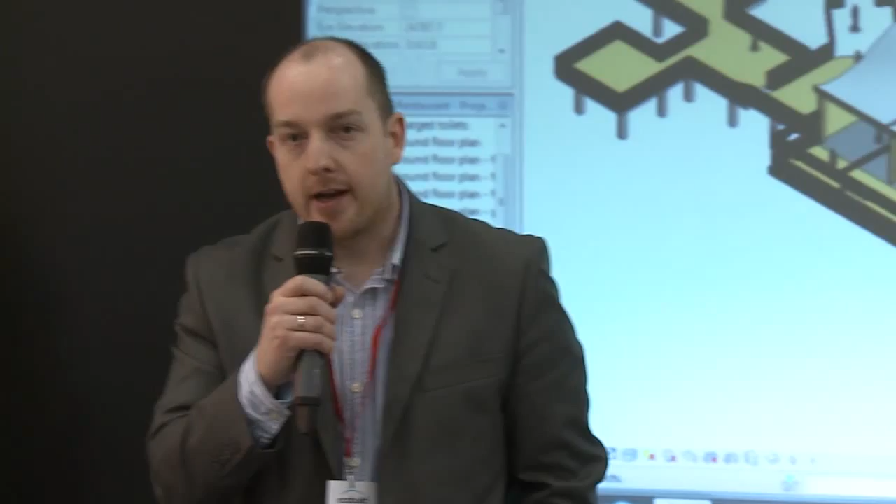Thank you, Paul. Hi, my name is Stephen Hamil, and I'm Director of Design and Innovation at NBS. For the next 15 minutes I'm going to talk about the National BIM Library, an initiative we launched at EcoBuild last year, about producing standardized BIM objects that are free for the construction industry in the UK.

We've got about 600 objects live now. 400 are generic, meaning no manufacturer is mentioned, but they've got standardized property sets behind the scenes. And then we've got about 200 now that are proprietary, so manufacturer objects representing the actual manufacturer performance properties and operation properties.

What I'm going to do today is not open up PowerPoint, but I'd like to just play around with some of the software and see where that takes us. So what we're looking at on the screen at the moment is a package called Autodesk Revit, but the objects also come for Bentley, AutoCAD, and Vectorworks.

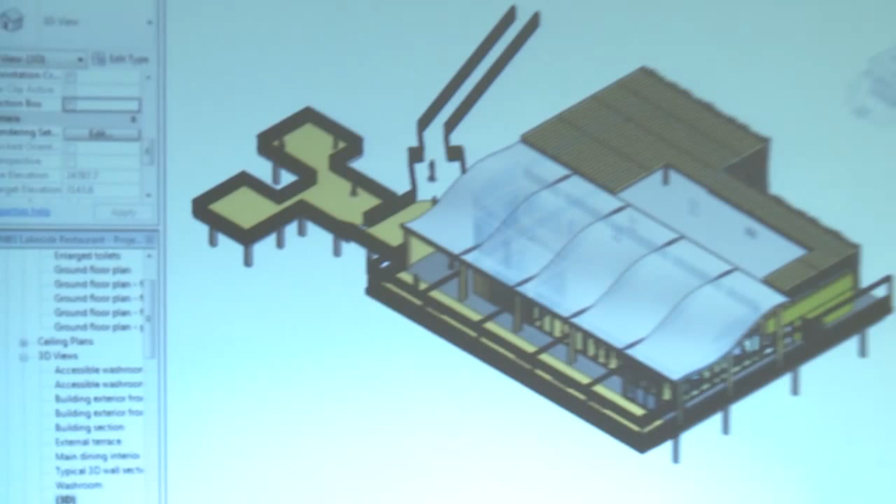We can see on the screen quite a simple building, one story high, and this has been put together, designed using the National BIM Library components. It's a sort of restaurant that you might find at the side of somewhere like Center Parcs.

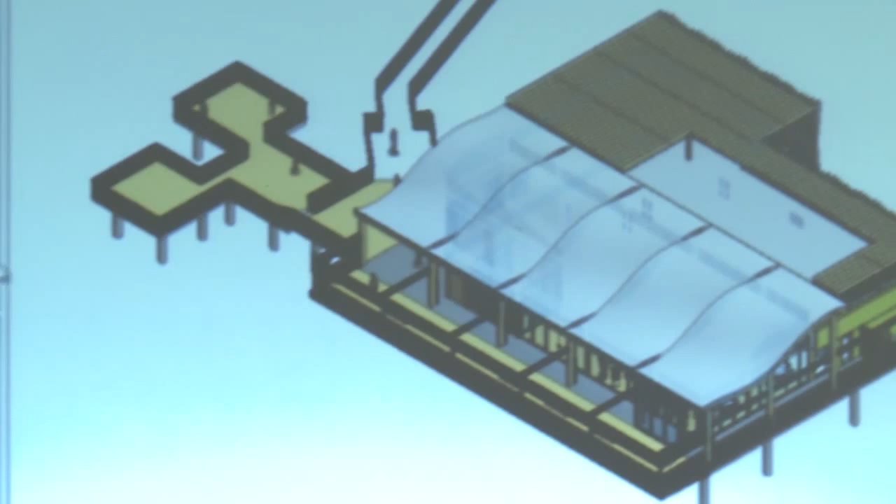What I'm going to do is just take a little cut through the object so we can look at the objects inside. I'm going to come along now into the 3D view and just put the section box up. You can imagine this is a cake that I'm slicing through, and I'm going to grab hold of the knife and slice through this building.

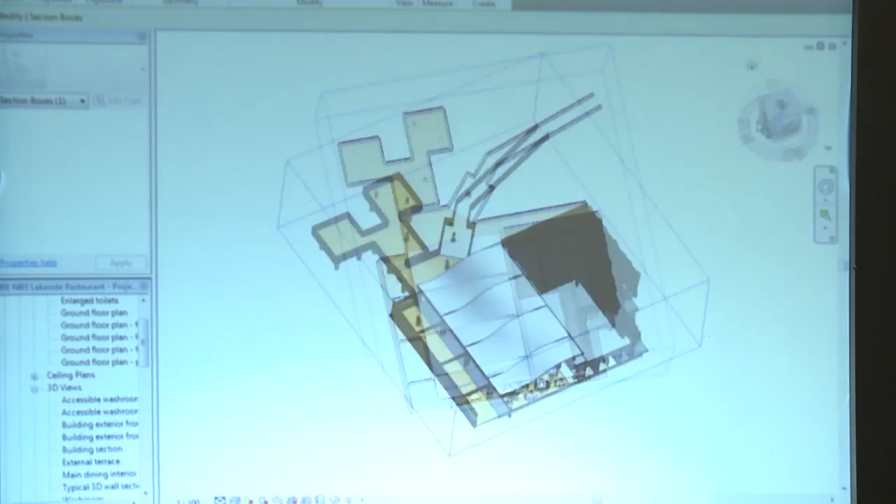I'll just zoom in here to this particular part, I think it's the washrooms. You can see that this is actually made up of objects - there's a floor covering object there, we've got partitions, ceiling constructions, sanitary ware, doors, windows.

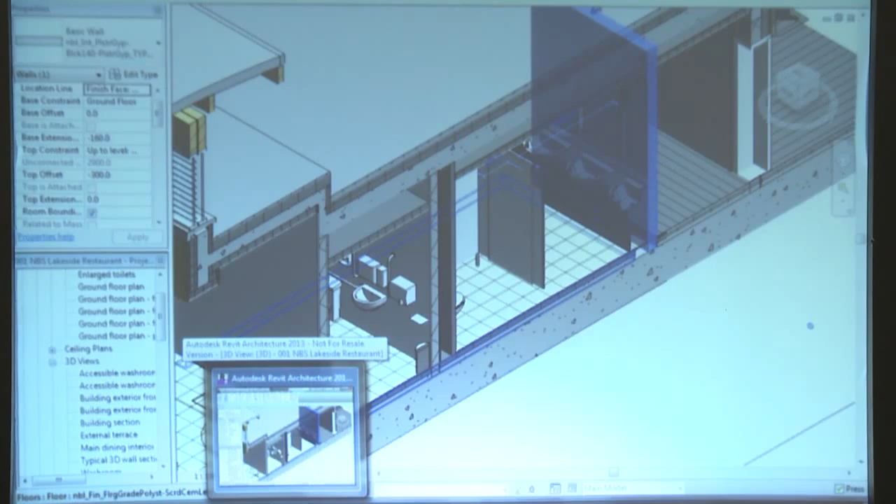So in terms of those 400 generic objects, it's all of the main building fabric objects that an architect would design a building from.

In terms of object development, you can start off with a concept object - things like a concept partition or a concept floor, to define the shape of your building and what the spaces will be, what the sizes will be, but without necessarily deciding the actual fabric of those layered objects. When the design develops, at that stage you can swap in the actual materials that are inside.

If you look at this particular wall, we now know it's an internal wall, plasterboard gypsum with 140mm block. If we have a little look inside it, you can see the structure where you've got plasterboards, blockwork, plasterboard.

In terms of something like walls or partitions, we've got around 80 of these, the most commonly used ones in the UK. By starting with that common palette of tools, it means when the design team gets together, they can start using these from project to project.

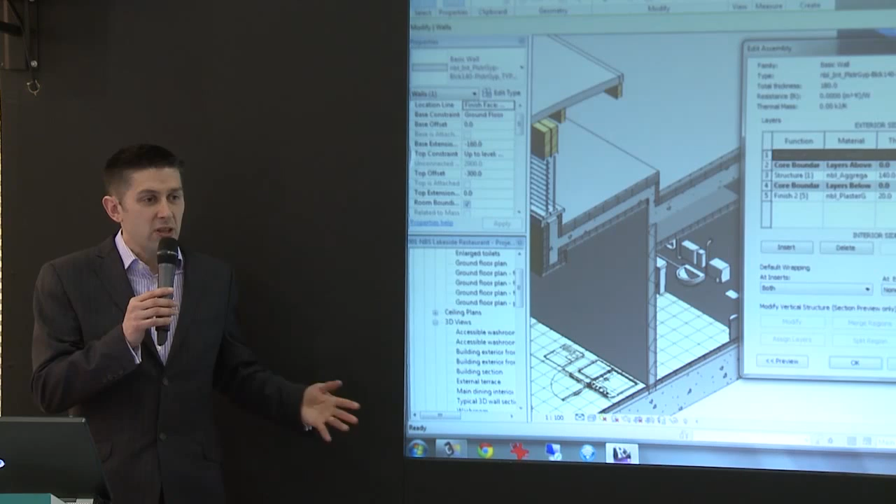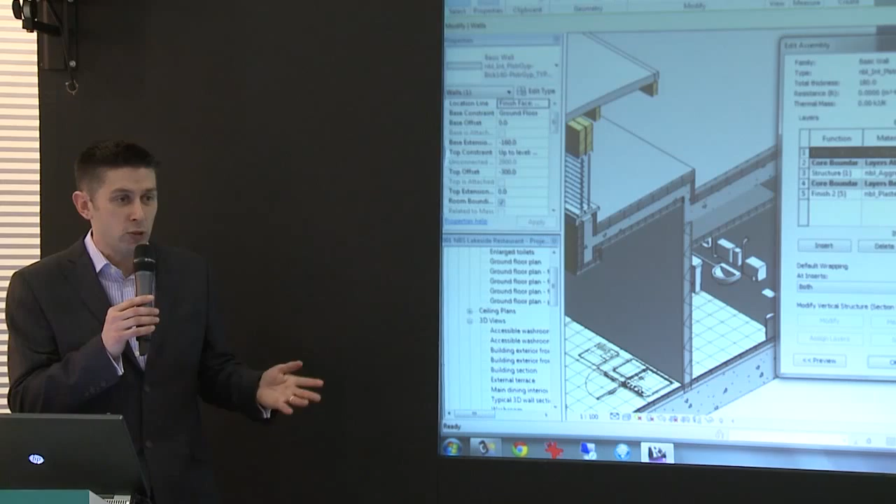If you imagine design and build projects where the main contractor works with different consultants on every project, it means they're getting consistent information every time. It means when a cost consultant works with different design teams, again they're getting consistent information. And that's such a fantastic idea, as opposed to everybody doing it differently in every office around the country.

This is where NBS first started in terms of specification. Back in the 1970s, everybody was doing specification differently. The RIBA took a group of four architectural practices in the Northeast and said, come on, we shouldn't all be doing this differently, let's have a standardized specification system. 40 years later, NBS has developed to where it is at the moment.

We're now doing this with BIM as well. So we've had a little look at layered objects. The basic concept of BIM is that you develop a 3D model, and then you can take cuts through it and display the information that you would like at that particular time.

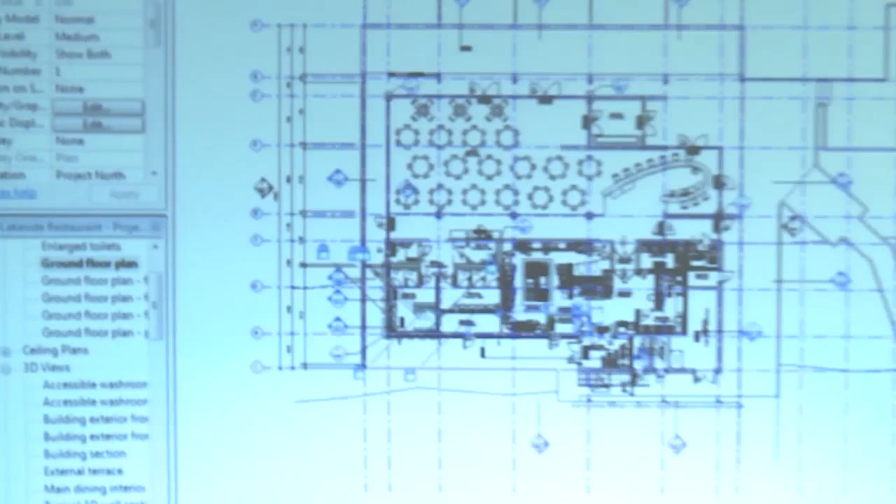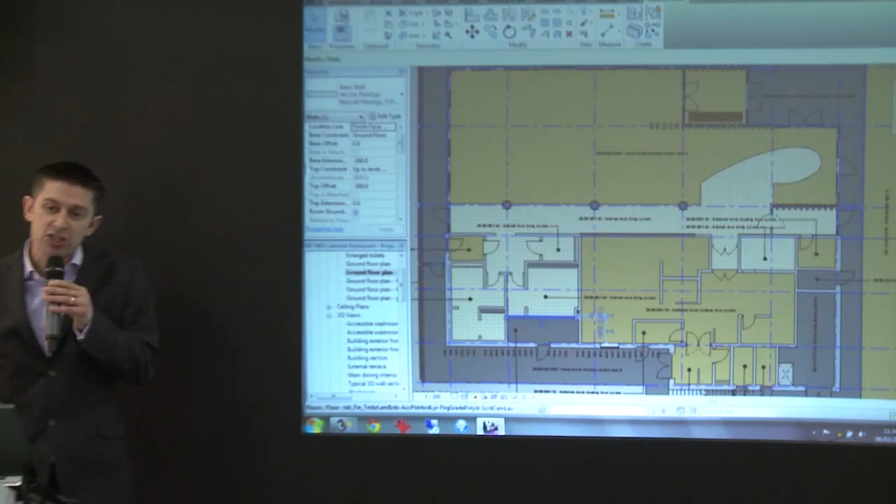So here's a cut which shows the floor plan. Here's a cut where there are just different styles being attached, maybe some things made invisible, so you can just look at the floor coverings. And that's all generated from the central model, so if you change it once in the central model, it updates in all of your sections, your floor plans, your schedules. Let's just have a look at a fire plan here.

I'm just going to zoom into this area here, and we look at one of the National BIM Library doors.

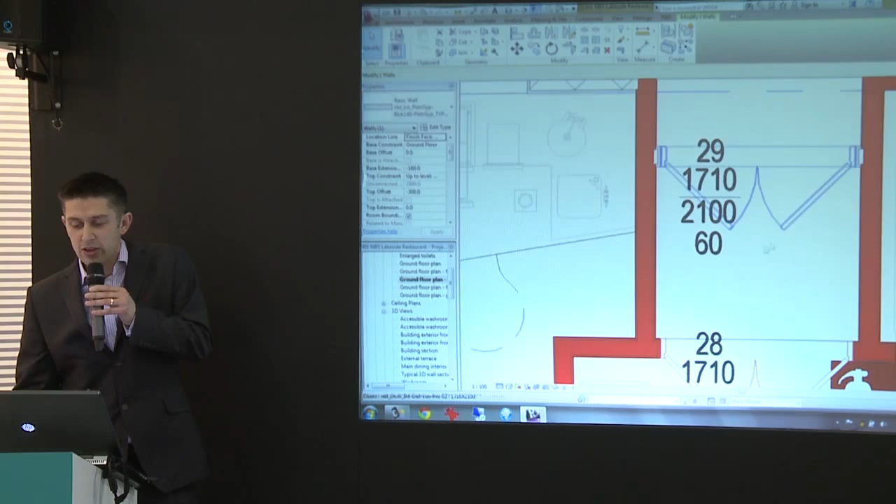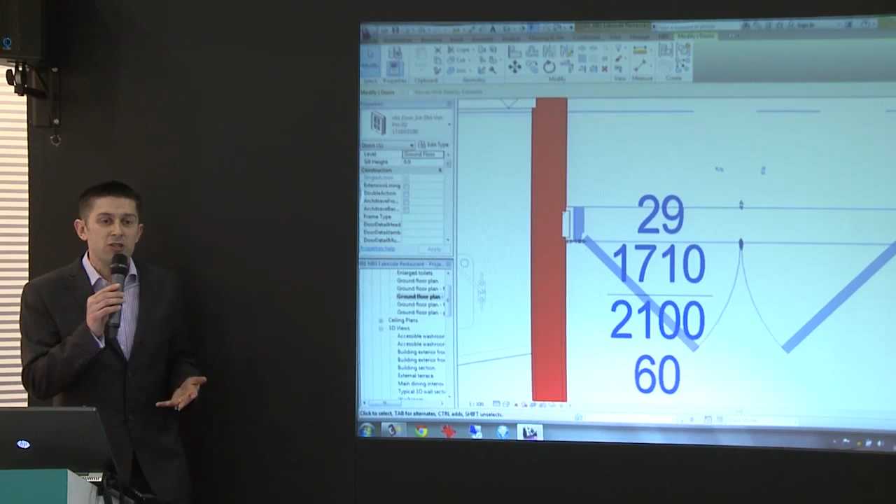In terms of the parameters behind the National BIM Library objects, you can group them into two broad categories: parameters that control the geometry, how it looks in sections and floor plans, and parameters that define the performance, such as fire rating, acoustic rating, surface spread of flame, etc. All of those parameters come from a standardized global template, using the same naming convention whether it's Autodesk Revit, Bentley, or ArchiCAD. So when you get federated models coming together, it's the same consistent naming throughout.

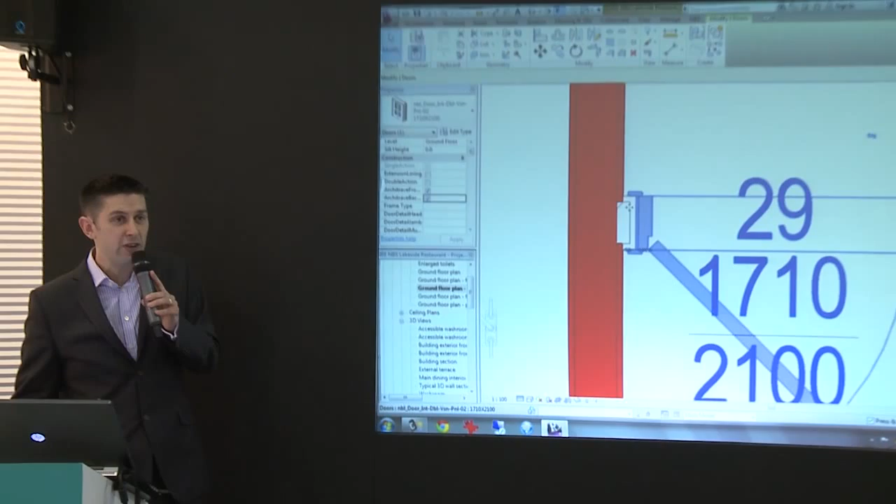Let's have a look at some of the geometric parameters. Let's say on this particular door you want architraves on the front and the back. It's just a simple tick of the checkboxes on the left-hand side, and you see that visually on the floor plan it now adjusts. If I'd like to change the opening angle of the door, I can drop down a little bit here and change it.

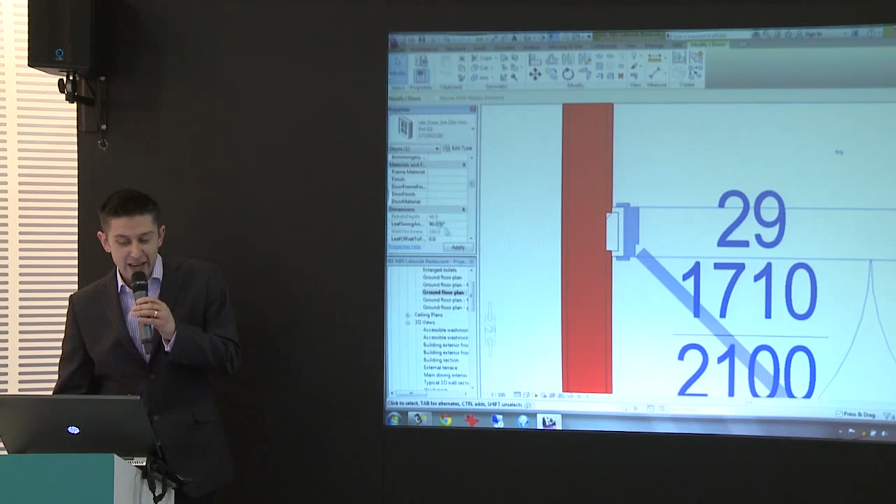It's quite tricky to do with the mic. Change that to 90, and what you can see is the doors instantly change from indicating 45-degree opening to 90-degree opening.

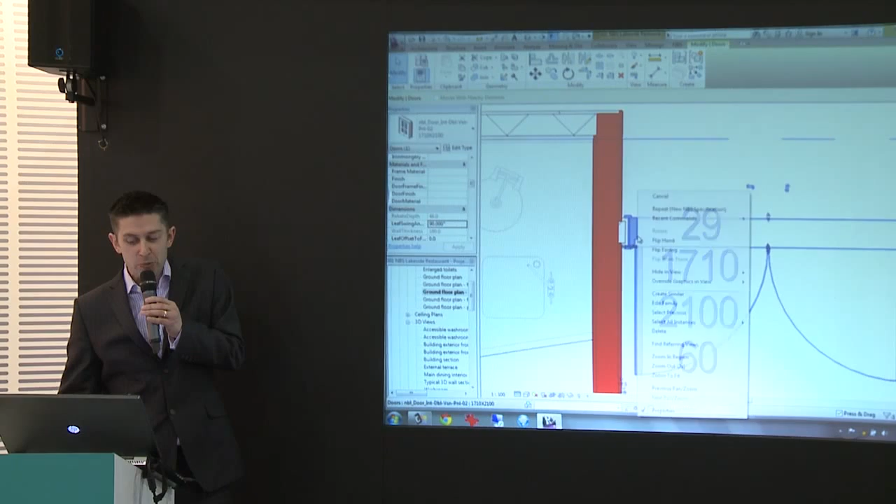The thinking that's gone into those geometric parameters has been months and months of work. So if I actually look at the rules behind the scenes and come into the family editor for this door, you can see a little bit of how it's been constructed. We've got vision panels that align to the British Standard recommendations.

If I look at the parameters behind the scenes, you can look at some of the equations. Just something like, what have we got here, the clear opening width. You can see how it's been defined as a combination of the structural opening width, the structural tolerance, and the frame thickness. That's been developed talking with some of the leading door manufacturers in the UK.

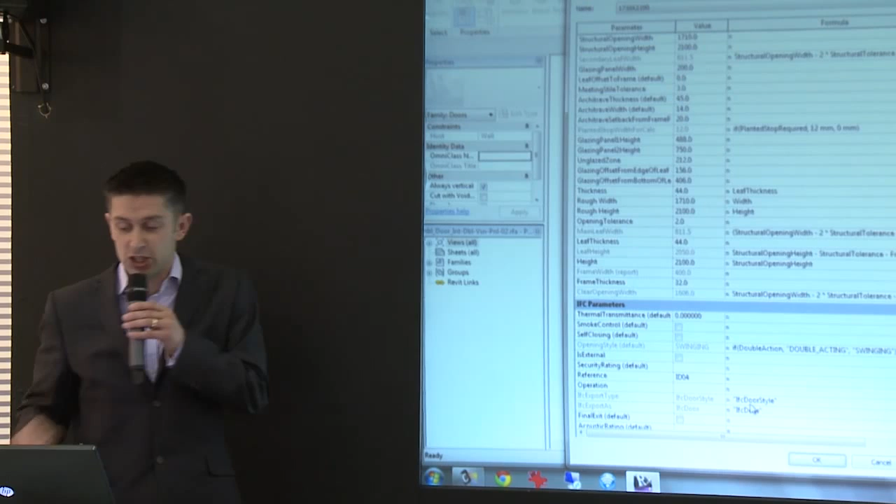So we've got fantastic objects there, whether that's doors, windows, sanitary ware, or signage. Each object, which is free to download from nationalbimlibrary.com, also comes with a help guide. If I jump across here now, I'm not connected to the internet, but you can see we've got a 25-page manual, and that's there for every object. So free to download, you can get the objects in multiple formats and the associated help guide, all completely free for the industry.

Okay, let's just jump back to the software again, and I'll close the family editor. Most people don't have to open family editors. You can just use the objects with the nice functionality.

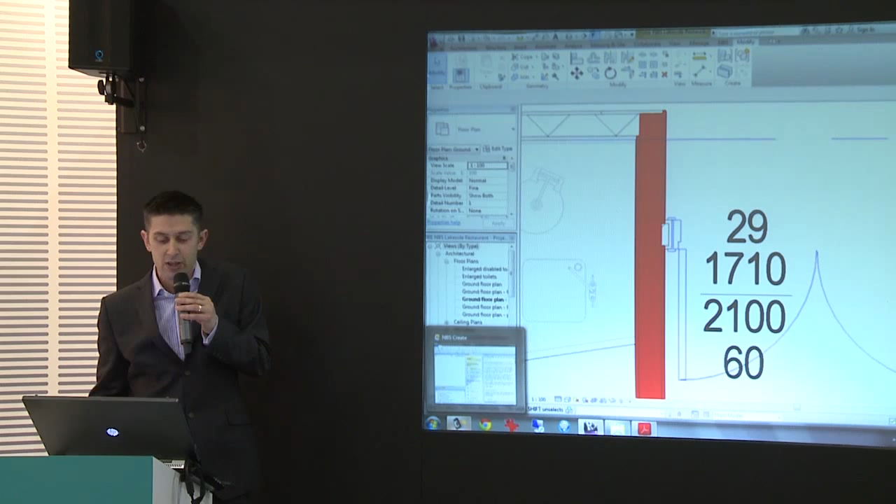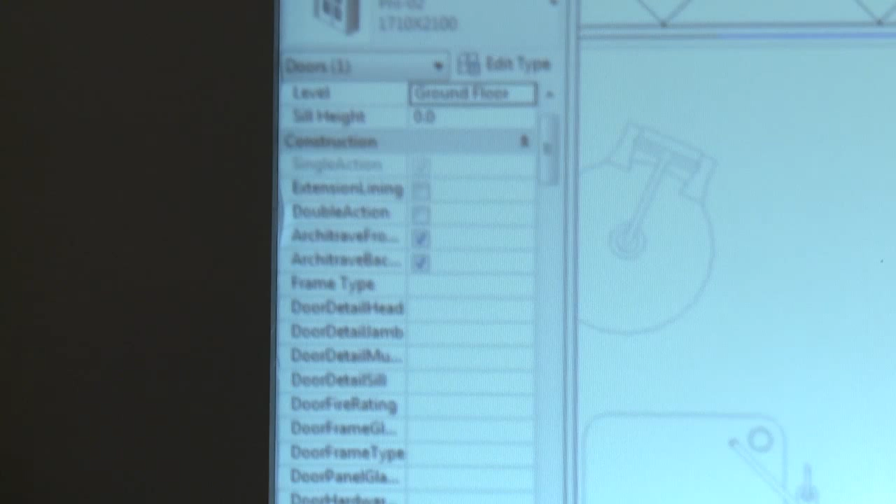Let's look at this door again and look at some of the performance properties. When we talk about BIM, we really want to focus on the I of BIM, the information behind the scenes. If you look at the parameters over and above the geometric parameters, you can see what we've done. We've gone to the international standards, IFC, as defined by Building Smart, and we've used all of the international standards for things like smoke control, acoustic rating, security rating, thermal transmittance, and fire rating.

That means it's consistent. Instead of getting a door out of the box with Revit, downloading one off the internet, someone in your office creating one, and all of that terminology being different, so when you do your door schedule the fire rating's all squiggly and has to be pulled back together, you've got a standard set. That means when you do your analysis, whether analyzing the building for environmental impact, cost, or performance, you've got those standardized property sets.

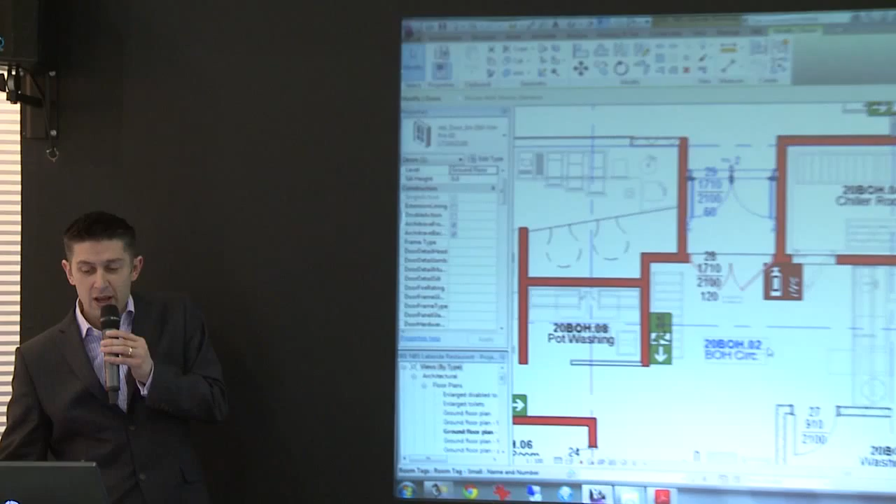So here's a kitchen that we're looking at, and what you can see here is a very simple performance analysis. When the fire rating is 60 minutes, the elements color blue. When it's 120 minutes, they color red. Around the kitchen you might want a 2-hour fire rating, and you can quickly glance here and see that this particular door is being specified incorrectly because it's colored blue.

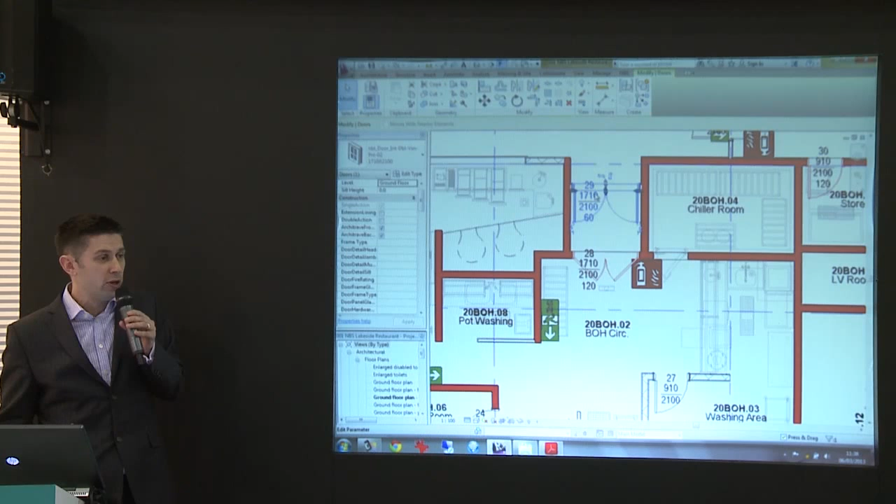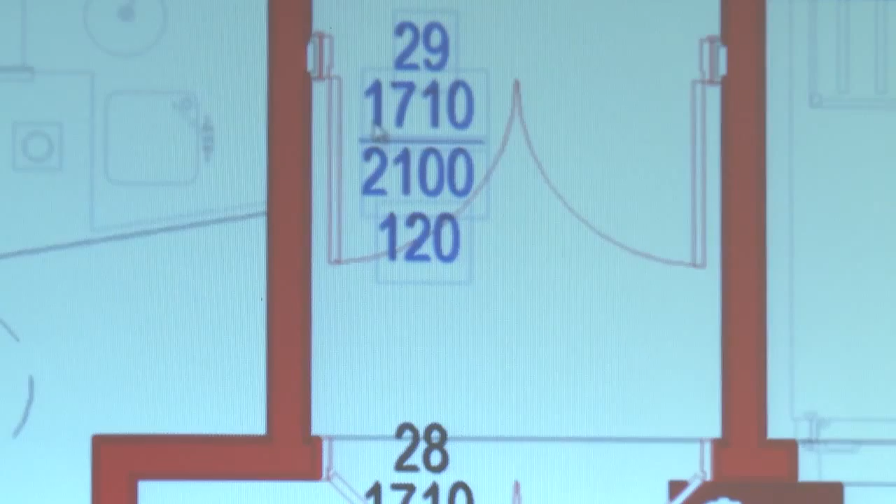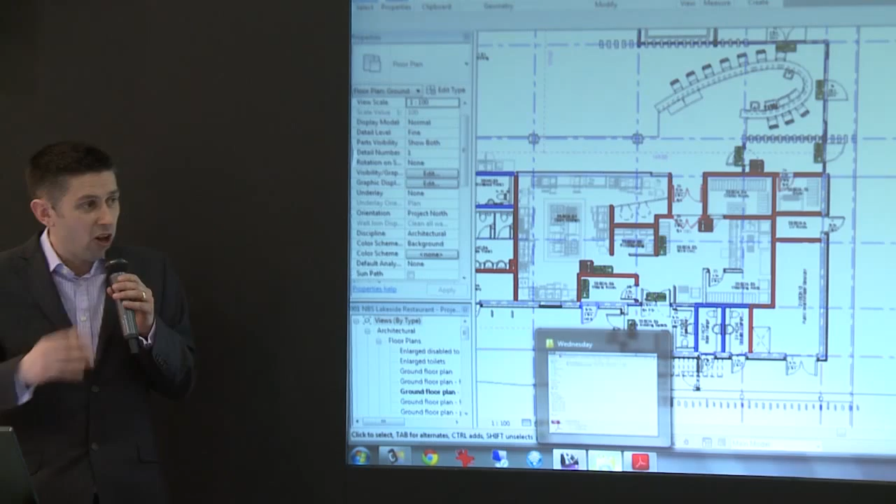So what I can do is select the door, jump down to the fire rating with one hand—I need a helper, I think—come down, there's fire rating, and I'll change that to 120. You can see the blue door is now changed to a red door, and that information's clearly labelled. I know this is a very simple building with one floor, not particularly big, but on a large development, that ability to change consistent parameters and see that visually across the entire floor plan means big efficiency savings and solves problems that may appear later on.

I know it's a quick 15-minute presentation today, but similar things apply for windows, and there's quite nice fire signage. One bit of functionality on the signage is that they're actual size when you see them in 3D, but when you look at them in plan, we've oversized them.

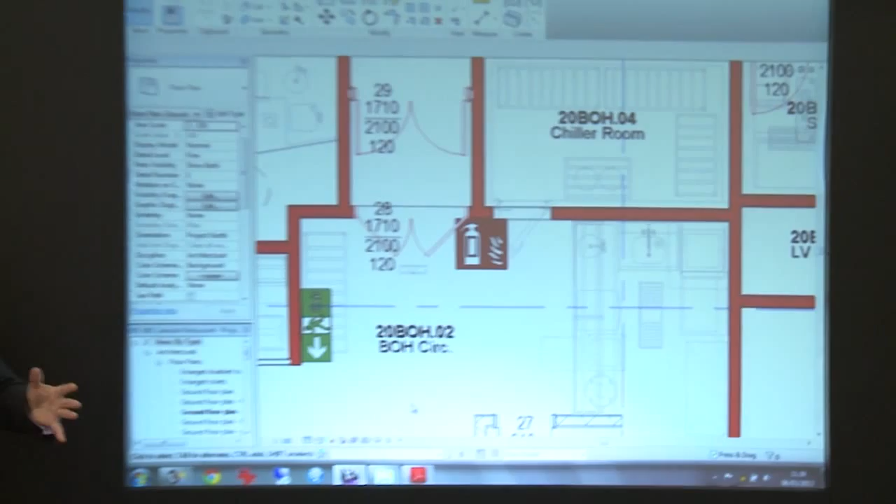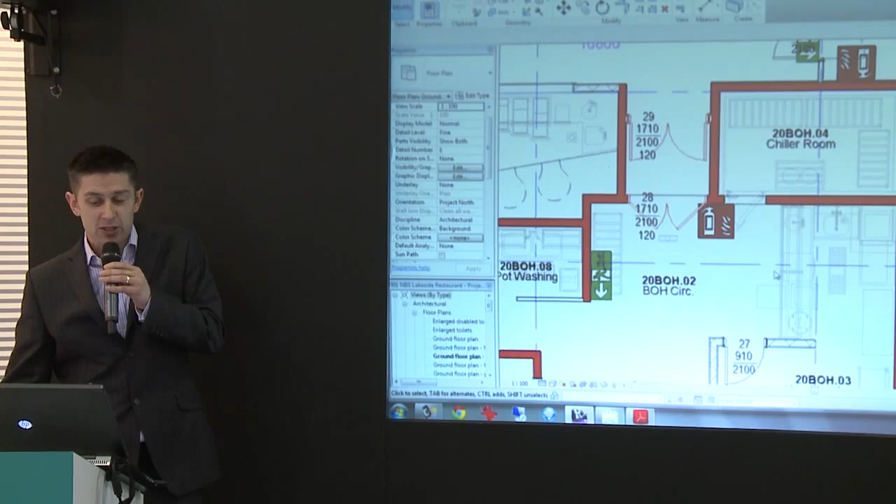So let's say you're the chef cooking here, and you set the chip pan on fire. Where's the nearest fire extinguisher? You can't put the fire out. How do you quickly get out of the building? You can see the exit signs. Again, these aren't objects you've downloaded from America, Canada, or New Zealand, where the signage is different—these are from the British Standard official graphics.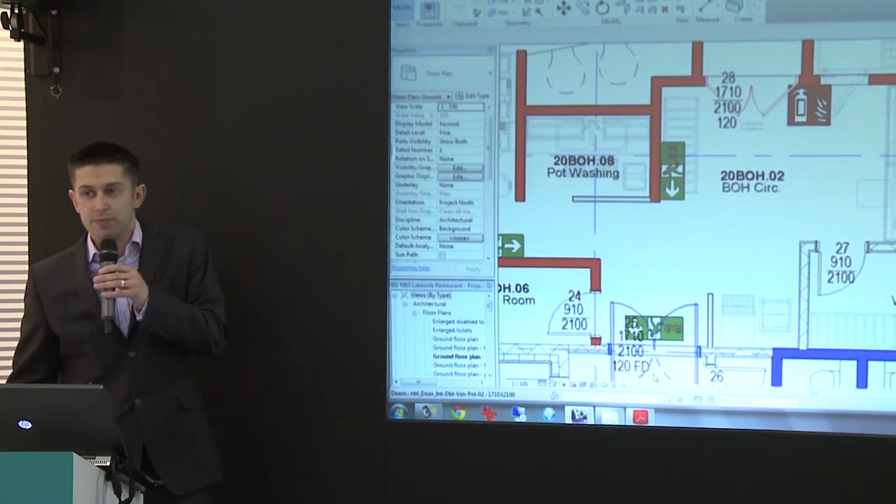The reason National BIM Library is free is because it's funded by manufacturers. We've got 13 manufacturer contracts in already, and a number of manufacturers that are really keen to get on board. I think when I do this presentation again this time next year, that number of 13 manufacturers will have grown to maybe 50.

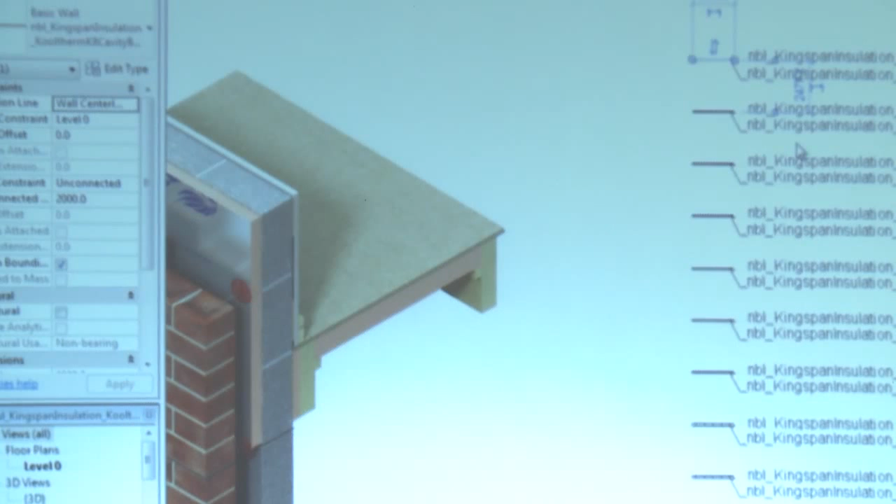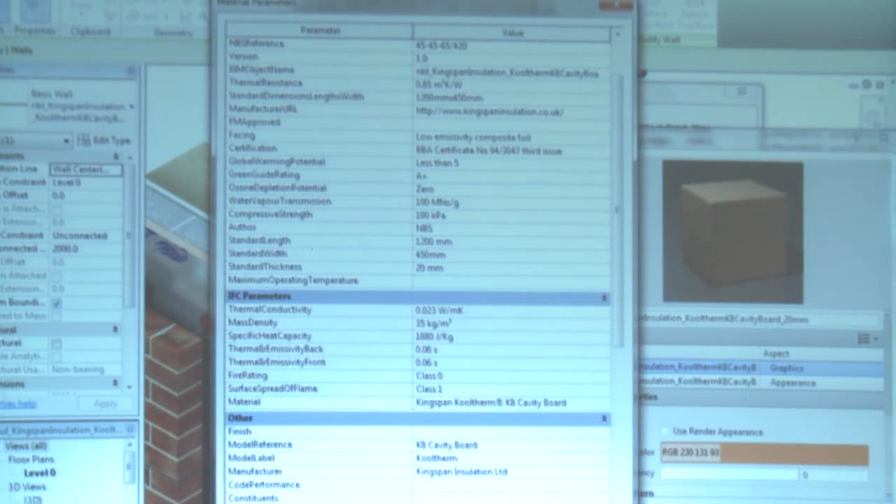And the great thing about the manufacturer objects—I'll close this model and open a different one—is that they come pre-populated with all of the actual physical properties. So here's Kingspan insulation, and if I look at the properties, you can see that's filled with all of the properties for that material: the global warming potential, the green guide rating, the standard sizes, standard length, width, thickness, all of the IFC performance parameters.

Putting that information in allows incredible possibilities on material takeoff, looking at the properties inside, recycled content reports, but also clever apps can be developed, just like you get for your iPhone. So with standard sizes, you could have an app that looks at the spaces in the buildings and tells you how much waste—you've designed a certain room with a certain window layout—what's the waste in terms of foam board going to landfill or back for recycling. Then you can adjust it at design time to make informed decisions. So using BIM to help reduce the environmental impact.

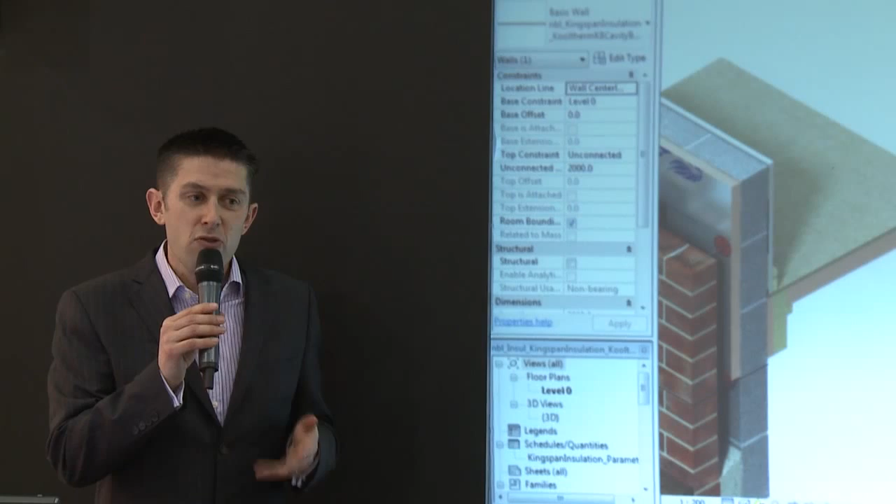So what I'd encourage is when you talk to manufacturers, and there's lots around here at EcoBuild, when they think about their marketing spend, do you really want glossy catalogs, do you really want 3 stories worth of stand at EcoBuild? Or do you want high quality digital information that will help you design? I think over the next few years manufacturers will realize that. Just as architects moved from drawing boards to computers, manufacturers will provide information in a structured format for designers to use and make informed decisions, producing more efficient, cheaper buildings that get built quicker, with reduced environmental impact.

As with the generic objects, each manufacturer object comes again with a user guide. So jumping across here, there's a user guide for Kalzip, and it tells you the naming convention, all the properties that are used, and how those properties relate to international standards, such as IFC 2x3, and also the UK government COBie 2012 standard.

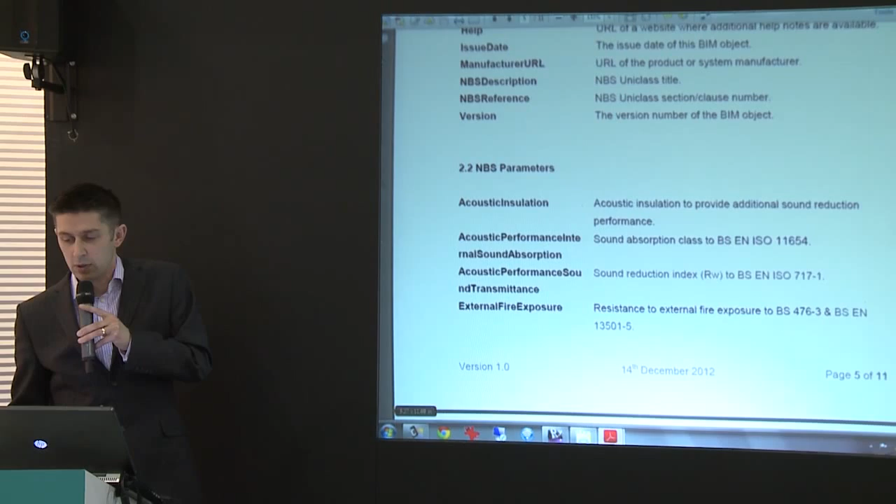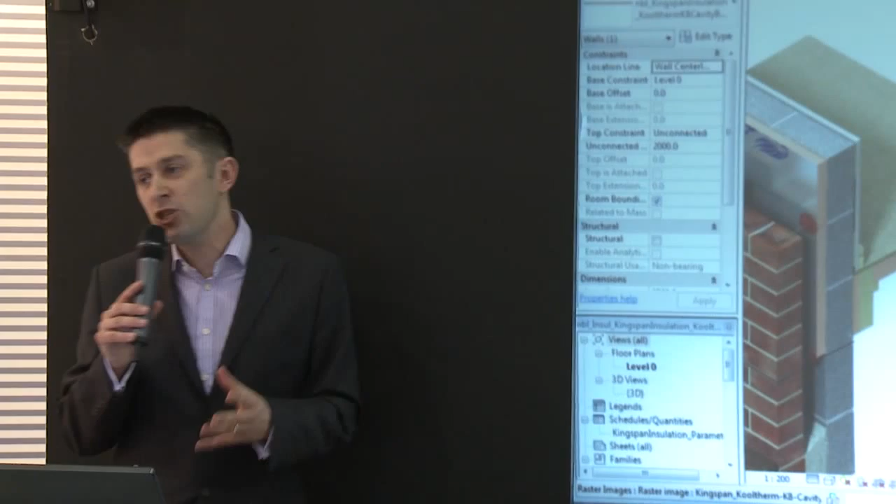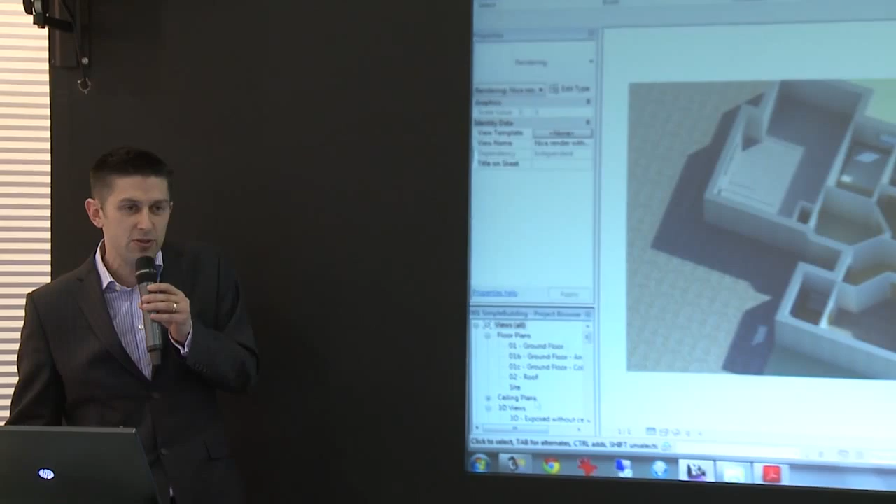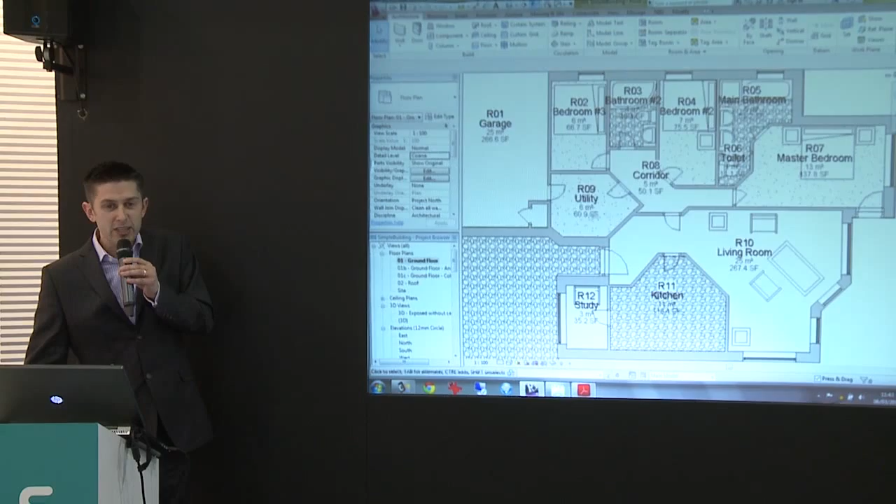So what I'm going to do now—I'm not sure how many people were here for the NBS Create presentation that preceded this—is show how the objects in a 3D BIM design tool like Revit link across to the specification system. I'm aware I've run out of time, but I'll keep talking anyway since the next presentation isn't until 12 o'clock, unless Paul drags me off. So I'm going to open up a simple building that I designed myself, with a few objects in to demonstrate how this 3D BIM model links to specifications.

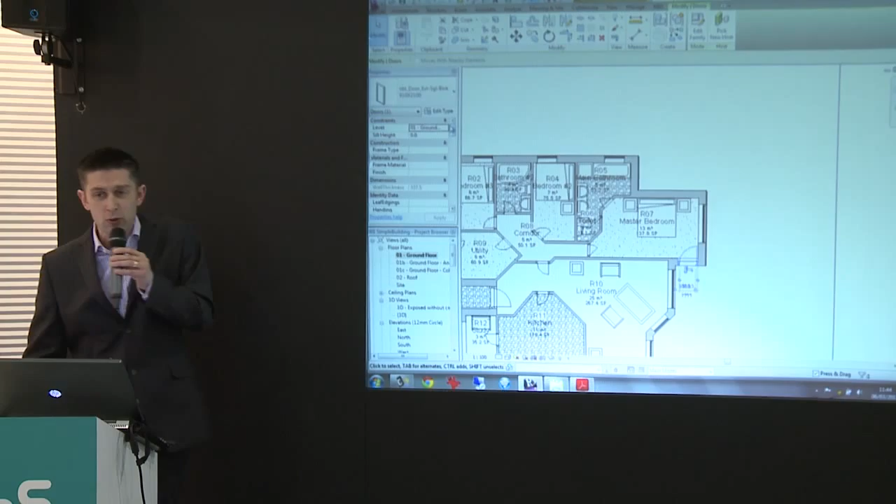What we can see is that all of the National BIM Library objects inside here are classified using the new Uniclass 2 object classification system. If I look at the properties behind here, I can see 25, 50, 20, 120. By having a common classification system for objects, it means all of these databases can now talk to each other, and an example of that is this simple button at the top.

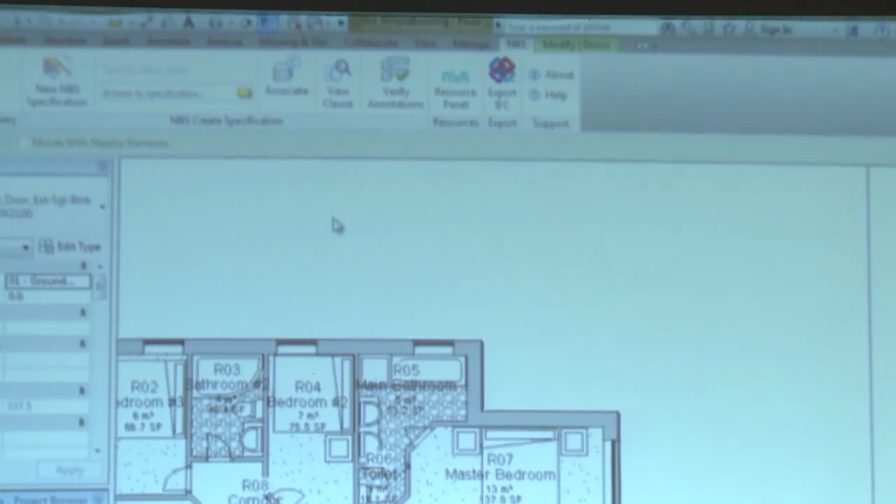So we talk about clever apps—here's a little app which fits into Autodesk Revit. We've got apps also for ArchiCAD, and one being developed for Vectorworks. I can click this button and create a specification—one-handed—so I'm creating a specification called EcoBuild 2.

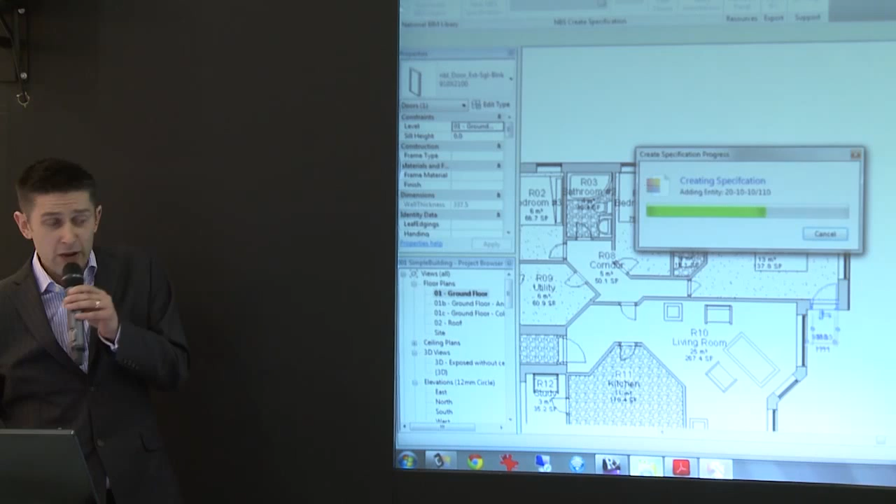When I click the Create button, it's going to analyze that design model, and every time it finds a type object, it downloads the very latest version of the NBS Create specification clause. So it finds 3 different floor covering systems, a ceiling system, partitions, landscaping, hard landscaping, turfing. For each one it finds, it's creating an outline spec that's ready for the specifier to complete. It's almost there now—when that progress bar hits the end, you get the confirmation.

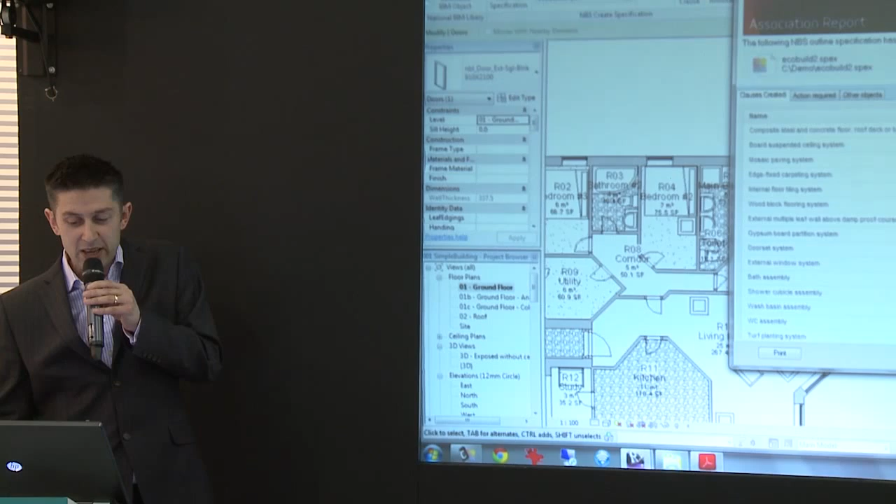So I've just created an outline spec with all of these items in. If you want to jump across and see them, it links with the model itself—there's the turfing outside the house, and if I wanted to see the concrete floor, there it is, underpinning the entire building. But when I jump across to NBS Create, our specification system built for BIM, I can open that specification, EcoBuild 2, and see all of those objects inside it. Then it's just a case of opening them.

So there's my partition system, and you've got that checklist of clauses, checklist of options that people have always valued NBS for, where you can go and build up the specification now.

So here's the questions. Do you need a damp-proof course? Expert technical guidance synchronized on the right-hand side. And depending on where it is in the building, what sort of project it is, I can make the correct decision.

And what that does is bring the very latest version of the product clause in. I can go through there now - what sort of framing would you like? I'd like a wood frame. Talk about the linings, the joint treatment, the finishes, what the tolerances are, what the workmanship is, what accuracy, what the quality of goods should be when it arrives on site.

Really plugging that gap that's there at the moment, which is the information in BIM. When people talk about BIM at the moment, I think they're talking about 2 or 3 things - drawing generation, creating schedules, and sometimes, where they collaborate, clash detection. But linking it to the specification allows us to really focus on the I in BIM, information in BIM, and to coordinate what's in your drawings and schedules with what's in your specification.

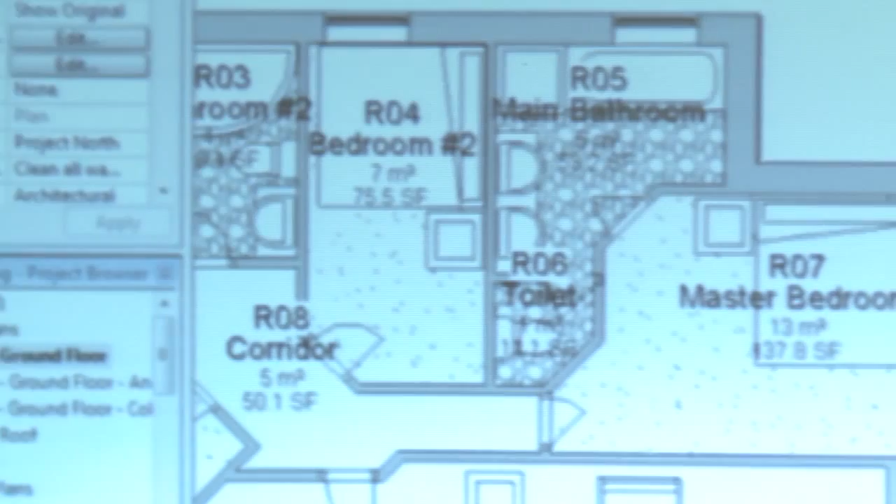The last thing I'm going to demonstrate here is how, when things change in the specification model, you can bring them back into sync with the central BIM. So a very simple example - I'm going to put a few annotations inside here. I'm going to annotate the bath, the wall, maybe the sink, and some floor covering system.

And just demonstrate what happens when things change in the specification. So I'm going to come to the bath and just change the name - I'm going to call it a bath system as opposed to assembly. And what I'm going to do is get rid of this carpet system - it was too expensive - and add a different carpet system. So I've got rid of an edge-fixed carpet, and I'll put a rolls carpet in instead.

So we've got a problem now, because what it says on the drawings and schedules is different to what it says in the specification. And that's where problems occur on site. Somebody buys the wrong product, it gets installed - who's going to pay for it? Is it the design team? Is it the contractor? Is it the client? How much money are the lawyers going to make?

And we can try and avoid that now by having clever software and objects that are linked between different systems. So I jump back across to Revit and say, give me a report on all of the linked objects. And it goes through every single object in the Revit model, compares it with every single object in the specification, and it just pops up a little report and tells you that 14 objects are fine.

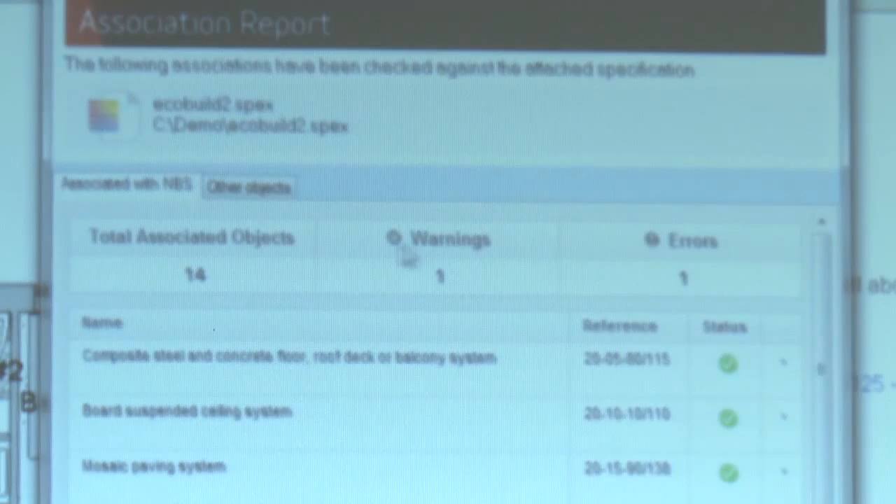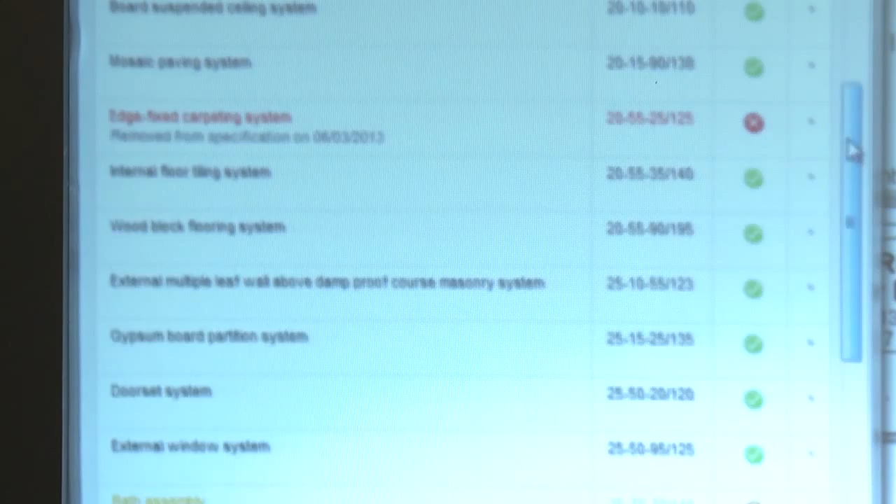So the partition system's fine, the ceiling's fine, the tiling's fine, but we've got 2 problems. The first problem is the carpet system that's been removed from the spec by Jimmy on a certain date, and the bath assembly is just coming up as a warning because it's just the title that's changed.

And what I'm going to do here for the bath is just pull the latest title through, and you'll see the bath assembly changes to bath system. And that wouldn't be done just on that floor plan, but every single time that bath is referenced - so in your multi-category schedules, in your sections of the washrooms.

And what I can do for the carpet system is slightly more complicated. I've got to actually jump into the specification and find the new item. I might want to shout across the office and get the guy that's writing the spec to stand with me, and maybe as an architectural technician I can sit there with the specifier. Just got to find where it is - find the new carpet system, and it's a single click, and you can see it just brings everything back in line again.

So what we're seeing there is standardized objects that can be used when people are building models at the moment. You can go to nationalbimlibrary.com, use these objects and have standardized objects used for buildings, with all the consultants working together. We're working very hard this year, and we're going to try and match the 400 objects we've got for building fabric with another 400 objects for service engineers, and we're really going to push the manufacturer content again this year.

But where you can get the real benefit is if you link the information in your models with the information in the specification, where the real detailed information is. And you can have the main model working with the specification model, and then coming together, generating your COBie output, your IFC output in a really rich format.